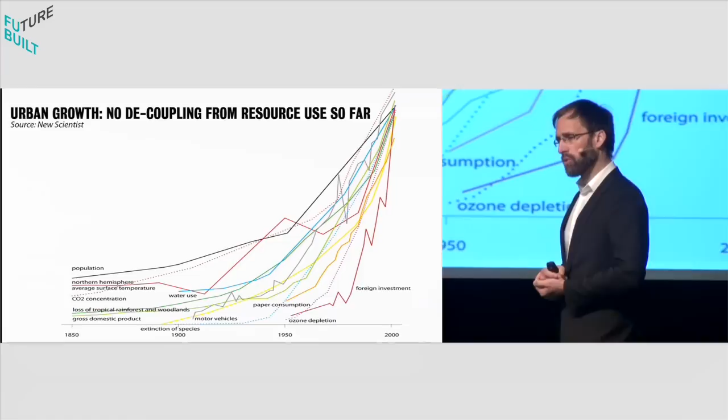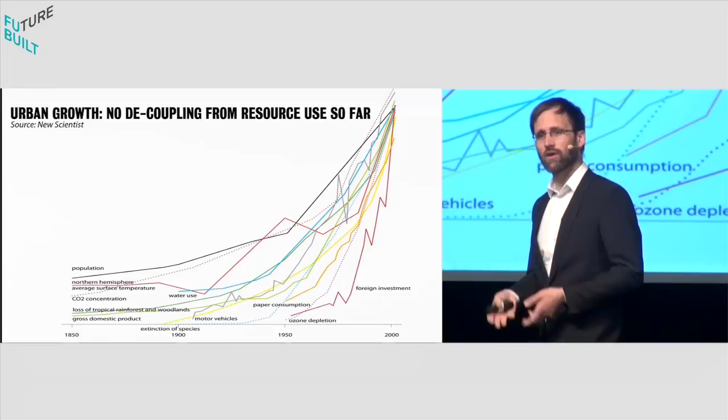I'm showing you here various growth curves, and it's important that we consider growth not per se as something problematic, but that we celebrate positive growth around health, education, prosperity. But clearly, for a finite planet, there are growth curves, and some of them you'll find here, which are hugely problematic: resource use, carbon emissions, pollution.

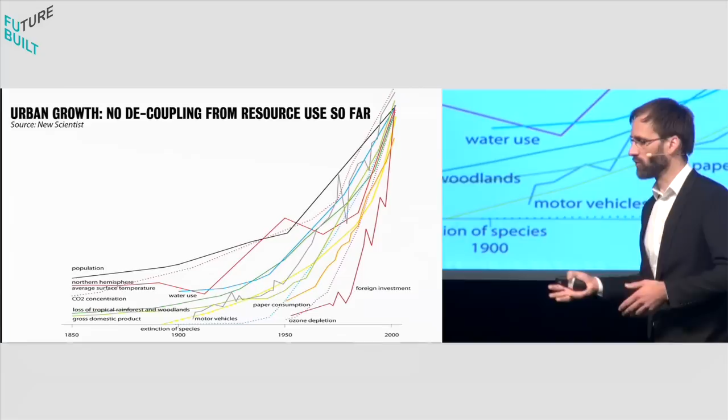Within the next generation, or our current generation, we will start bending these curves and do something which economists refer to as the decoupling of good growth from the bad growth we no longer can afford. And that process will be disruptive, and it will be very much led by cities. That's sort of what I'm mainly talking about.

Before that, there are two areas I should highlight that are specifically important about the building of cities, areas which we often don't reflect enough about.

The first is about the embedded energy demand and the embedded emissions that result from simply constructing buildings and cities. So not only the operations, but just constructing buildings.

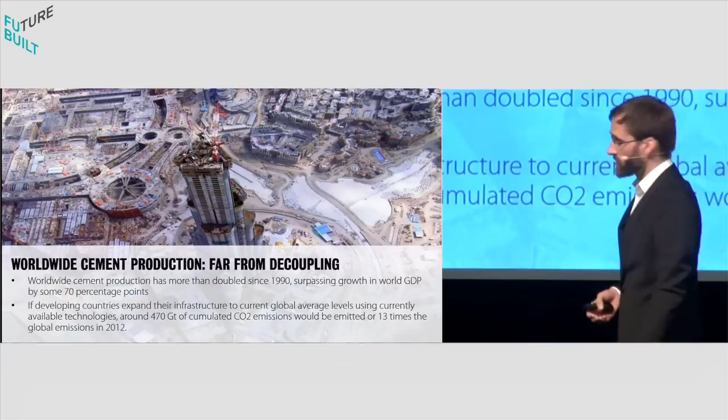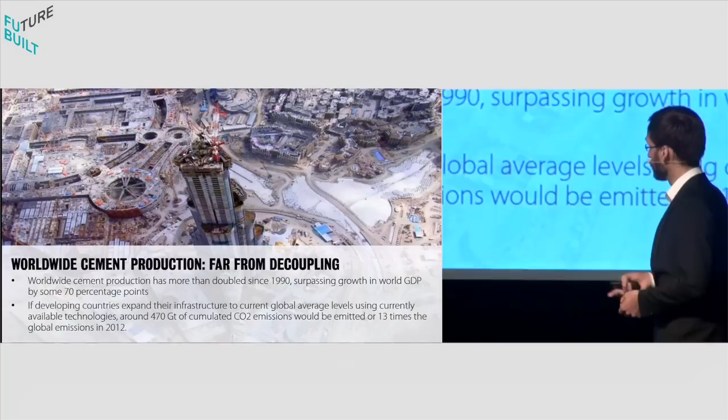If we're looking at this, it's a sort of very sad reference where we're realizing that rather than decoupling, we're doing the opposite. We're actually using more and more energy to get relatively little economic output. Worldwide cement production, since 1990, has actually surpassed the growth in global GDP by some 70 percentage points.

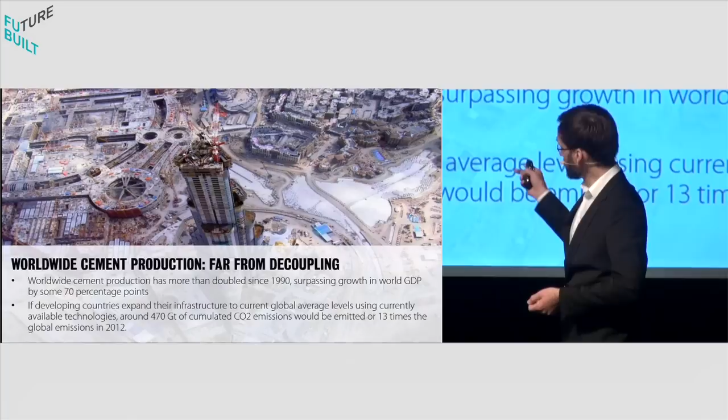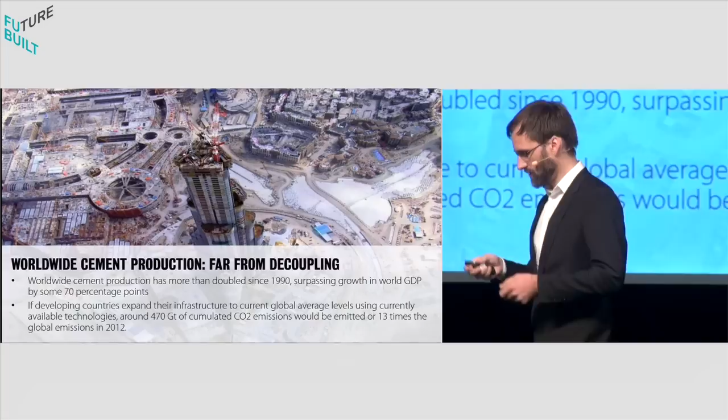That's a troubling story, and it's getting even more troubling if we're thinking about embedded carbon emissions. If we simply continue building cities as we have done so far, predictions are that within a short time, we will increase global carbon emissions by 13 times what the emission was in 2012. Only by continuing to build using steel and concrete as we've done so far, we will already be challenged in meeting the 2-degree centigrade objective. So we really need a big U-turn on the construction side itself.

We also need to talk about land take of cities. Urbanization is very intensive at the moment when it comes to land take. In a period of only 30 years, global urban land is predicted to increase threefold - this is only from 2000 to 2030. Managing this urban expansion, ideally reducing it, is probably one of our biggest responsibilities.

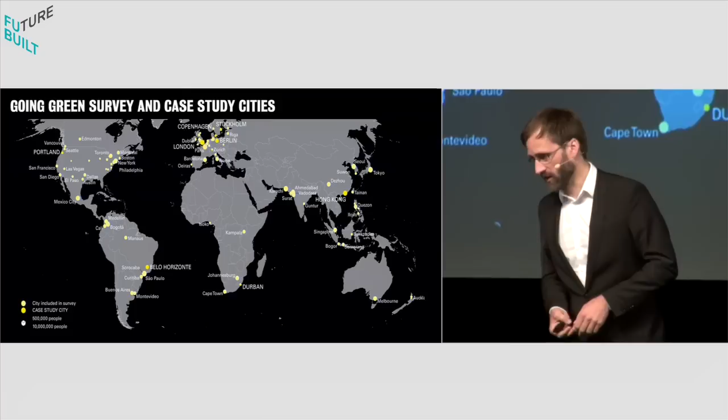So with that, let me come to the survey which I'm going to build on for my main arguments. We interviewed, a few years back in the run-up to Rio+20, about 100 cities worldwide, asking them how they experience bringing together economic policymaking and green policymaking. We looked at about 8 cities in greater detail, where we spoke to local officials and did a lot of data research to verify the broad macro story gathered through the big overview. So what I'm going to do is give you teaser pictures of the macro story, but also go deep into specific case study cities and experiences on the ground.

With that, to my first overview on cities as first movers, to give you a sense that this idea of pioneering cities is not just a cliche, it's actually happening. We have relatively robust data on the decoupling of economic growth, of prosperity, and at least local emission impacts for a range of cities.

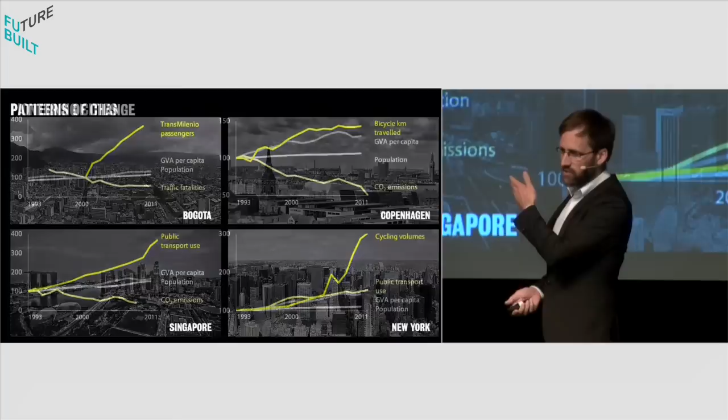I'm using here a few examples. These are wonderful decoupling curves. What you see here in gray is, in all of those cities, a considerable increase in traditional economic growth and population, and at the same time a real improvement using different indicators on the environmental front.

An extreme case is Copenhagen, with a considerable reduction of carbon emissions, which is actually not unique to that city. We've done detailed work in Stockholm, a similar story, and as far as I know Oslo is not that different either. From '93 to 2011, we have an increase of the city's economic output by almost 40%, and over the same period, a reduction of carbon emissions to 70%.

Now we need to be careful here. A lot of this is linked to deindustrialization and simply outsourcing the emissions, so that's one part of the story we need to tackle. But at the same time, we also know that from building retrofits and dealing with our transport systems, these are very real emission savings which will help us enormously in the future. Mark Watts will talk more about the pathways cities will develop in the future, helping with this equation.

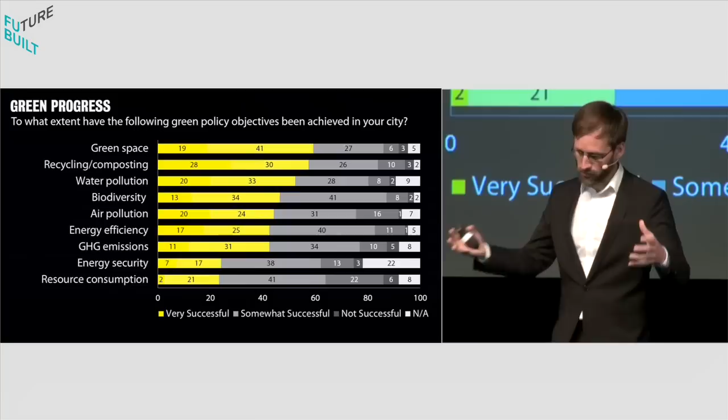Anything that these subjects respond positively to is highlighted in a shade of yellow. The more negative ones are in gray, and then we rank the results from most positive to least positive.

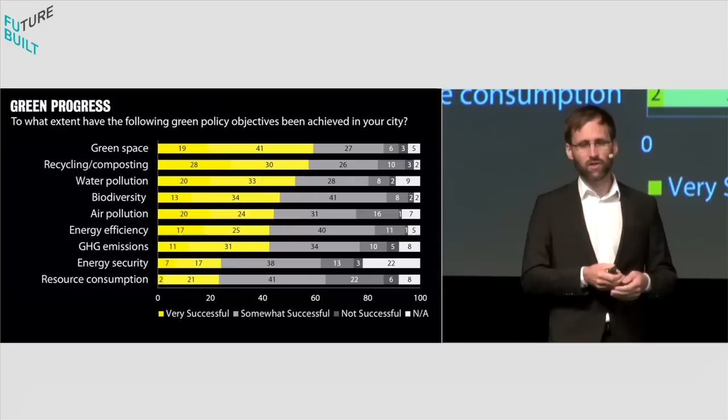Here's the question about green progress: where have these roughly 100 cities been successful in achieving green policies? It's the low-hanging fruit, of course, of green space provision, recycling, composting, water pollution. These have been addressed rather successfully in the majority of those cities. The big ones—greenhouse gas emissions, energy security, resource consumption—are still to be tackled, and we know where the problem lies here. A lot of it has to do with national and international frameworks.

Another bigger question we asked was about the trigger of these green and economic policies. In an interesting way, we have a combination here, unique to cities, of public opinion driving a lot of this, together with political leadership. In fact, there are very few cities where you'll find progressive policies that aren't linked to a name, and some of these names are in the room. Janette Sadik-Khan will speak later about her experience in New York. That's a unique situation where the combination of public opinion with leadership can really lead to transformative change. So the progressiveness of cities is something we can capture.

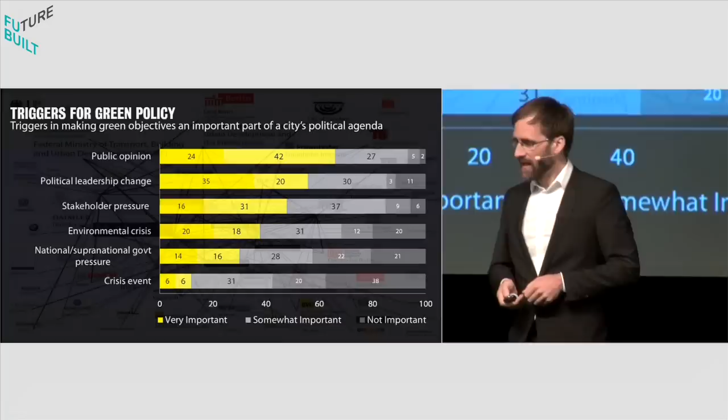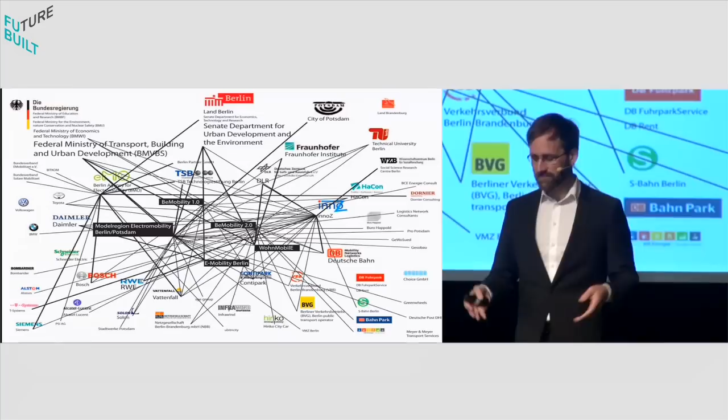Another area where cities are very good is becoming a broker, convening very different stakeholders. This is an overview of a rather complex matrix and network of collaborators currently delivering the so-called electric vehicle and e-mobility revolution in Berlin. It's very confusing, but the reality is that cities are better positioned than most other tiers of government to bring these players together, give them a focused area to intervene, hold regular meetings, and most importantly, often use the general public as the people trialing new ideas and reporting back—so you get a very interesting innovation cycle. The convening power of cities is a very significant advantage.

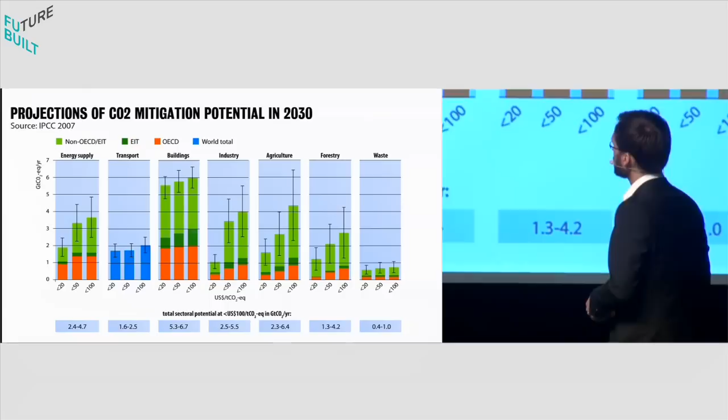So let me move to my second point, around policy sectors where cities are really making a difference. I'll step back for a moment using a slightly older chart by the IPCC, looking at where the real big potential is for carbon emissions. This is globally, not only for cities. Which are the big sectors?

Just to make one point, the session you're going to have later on buildings is exactly the right one. Clearly this is the area where a lot is happening, where again we have low-hanging fruit—the costs are relatively little in terms of bringing carbon emissions down. But there are other sectors, transport in particular, I'll come back to that, where the cost equation doesn't look as good right now; this is the real make-or-break of the climate story, because we're struggling to bring emissions down in transport especially. Here, just to highlight buildings, I'll give you some sense of how we, with our work with the United Nations Environment Programme, used a lot of good prior research.

It's a well-known story about the actual financial and economic benefits of going green. Kats, at that point, calculated that per square meter of a green building, in US dollars, over a 20-year period, you actually have a return in net present value of between 500 and 700 US dollars. Interestingly, the main return isn't related to saving energy—it's actually related to something else, the productivity at the workplace, quality of life issues, which are normally very hard to capture. Capturing these benefits is, in essence, the bigger challenge than the benefits existing in the first place. They are very real, they do exist, and I think it's part of the business model question where we're struggling to incorporate them appropriately.

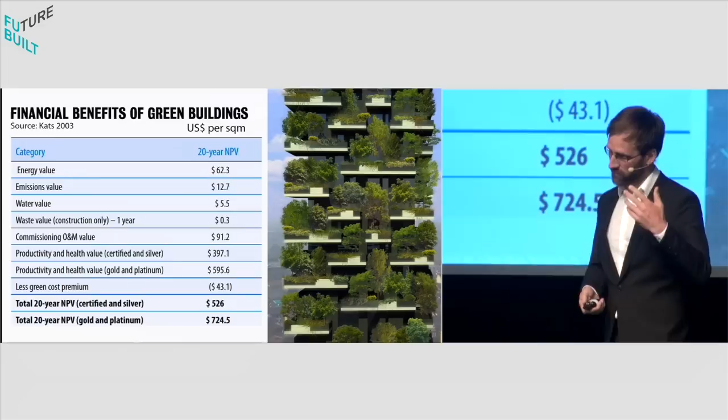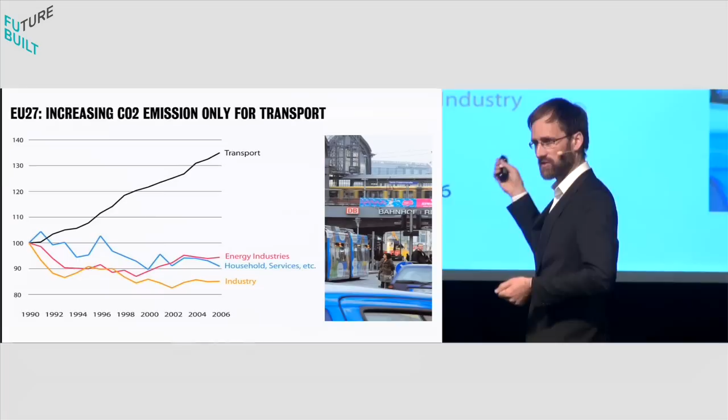I said transport is a problem—that's the chart I usually use to make that point. It's the EU27 perspective, at the time 27 member states, carbon emissions from 1990 to 2006, a highly urbanized context, so we're talking mainly about cities, and a context where arguably the ambition to reduce carbon emissions has been greatest around the world. You see some progress for energy, households, and industry, but it's transport that's going through the roof. This is really the make-or-break, as I said, of the climate story. The good news is cities are well positioned to make a massive difference in that sector.

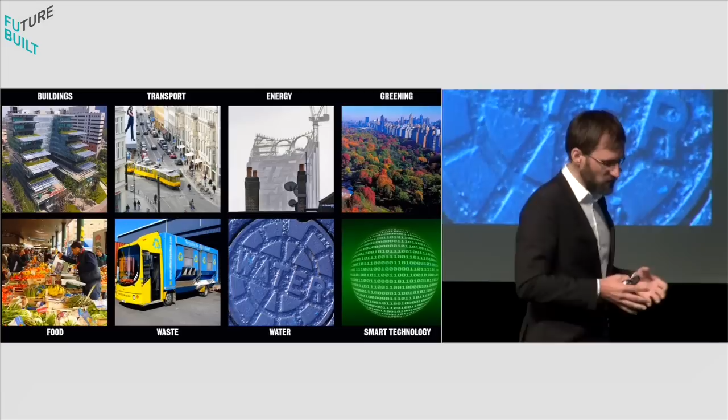Cities are often positioned as a context where policy making across sectors can really benefit from collaboration and much greater cross-sectoral integration. While that is true, particularly for planning, when we surveyed those cities, we were still able to get clear information quite contained within those sectors. I will now talk about the specific progress in these sectors and how we were reported back on what was successful and what was less successful.

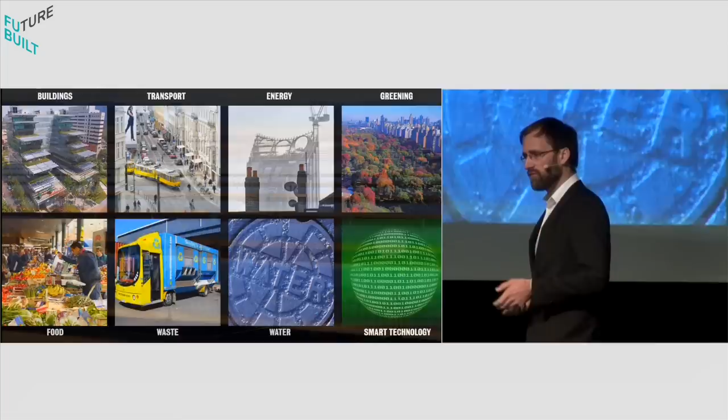Before going there, a very important test case about how cities can actually intervene in those contexts is about their actual power. Let me illustrate that with a nice comparison here.

We have done a lot of research that looks specifically at where cities actually have a say, which are the leading urban sectors. What you see here are classic areas of intervention or policy making, and anything in red is more city-related, whether at the metropolitan, city, or borough level. Anything in grey is usually higher tiers of government. You get a very clear hierarchy if you look across the board, with, of course, massive variances between cities.

Spatial planning, culture, utility, transport - classic urban sectors. This is where cities are leading. By contrast, it's more difficult to expect cities to lead on broad environmental policy, economic development, education and health. We need to keep those broad issues in mind.

So let's move on to one area where innovation has been massive and where cities have been celebrated probably more than in any other area, and that is urban transport. A classic urban area - I don't even have to superimpose the names of those cities because they are so much talked about across the world, in the general media, in TV programs. It relates so much to our daily experience in these cities, whether as tourists or residents, that we just know about it.

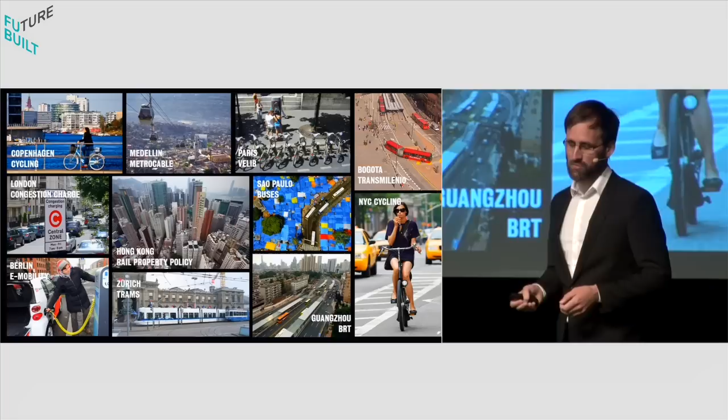And that is good news, because a lot of these projects not only make a difference in the city where they are taking place, but they have been stolen as an idea, scaled elsewhere, and are replicating themselves at an enormous speed. We're just seeing now the scaling of a lot of those interventions.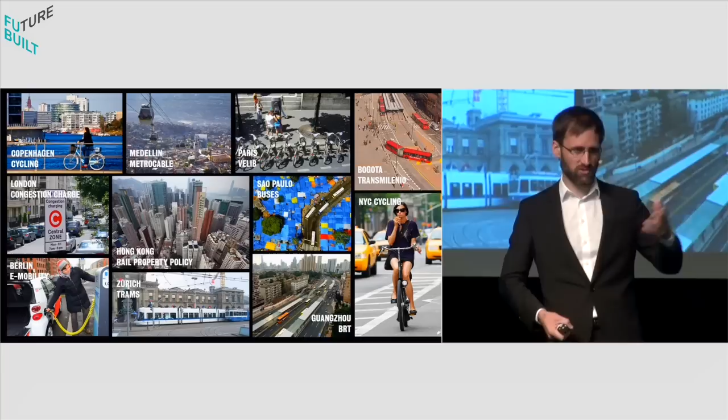At the same time, urban transport - a very urban sector - if you look in more detail into the transport sector, it's very multi-scalar and multi-level in governance. There are many cities where, particularly when it comes to big infrastructure spending, they entirely rely on their national governments. There are other cities which are told by their states they can't do congestion charging. So this is an issue we need to consider. While yes, mayors can make a big difference, it's often the national frameworks that allow them to be that innovative.

We then asked the question: which are the sectors where cities really see the opportunity of bringing together the economy issue, breeding local economies and fostering economic growth, while at the same time going green? And that's, as you heard before, where transport, energy and buildings come absolutely first.

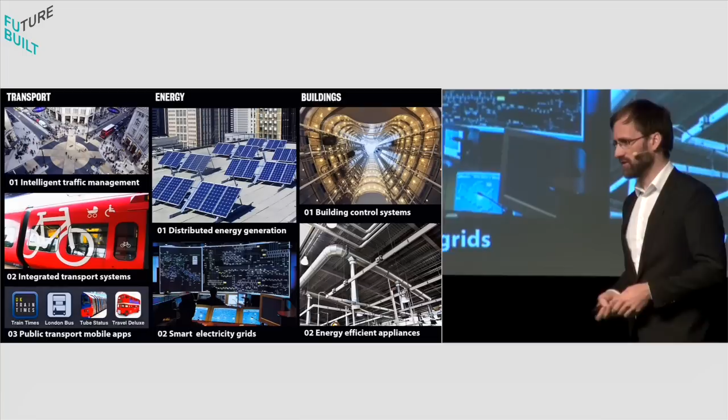We also asked about what kind of technologies are associated with local innovation that then is scaled and applied internationally. In transport, it's intelligent traffic management, integrated transport systems, and mobile phone apps, which I hope by now we all use.

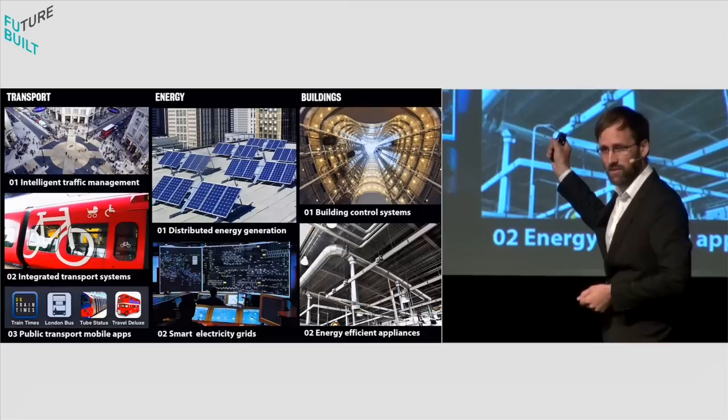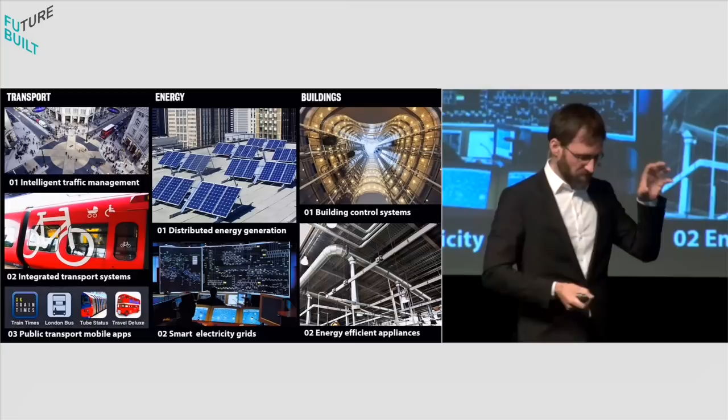In energy, it's of course distributed energy and smart grids, and in buildings, building control systems and energy efficiency. These lists were very long, but those are the headline figures which, two years ago, cities felt is where they really breed technologies locally, which they apply for their own context, but also hope lead to industry applied internationally.

So to come to my last point, you already saw that spatial planning expertise is particular. It seems to be led very much by cities. It's fair to suggest that cities, more than any other governmental context, are probably in charge of shaping our physical environments. That is good news. It's great news that this dimension is in the hands of more progressive leaders, because it has enormous long-term implications.

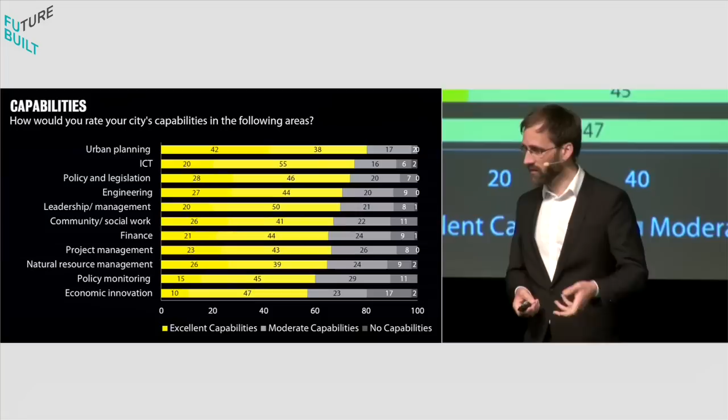No surprise here: number one, ranked by cities as their internal capability of dealing with different things, was again urban planning. This is fantastically good news, because the shaping of our physical environments has enormous long-term lock-in effects.

One example: transport. Using two cities at a similar wealth level, both appreciated by their residents for a similar quality of life—though a very different type of quality of life—Atlanta on one hand, and Berlin on the other, also similar in population size. The way these cities work is almost incomparable.

You see first in black the footprint of the built-up land, and superimposed in red, the public transport infrastructure. Of course, a massive difference. Now, where this story becomes really interesting is when you talk about the choice people actually have in terms of traveling in these cities. Less than 10% in Atlanta travel by public transport, walk, or cycle, and that share in Berlin is almost 70%.

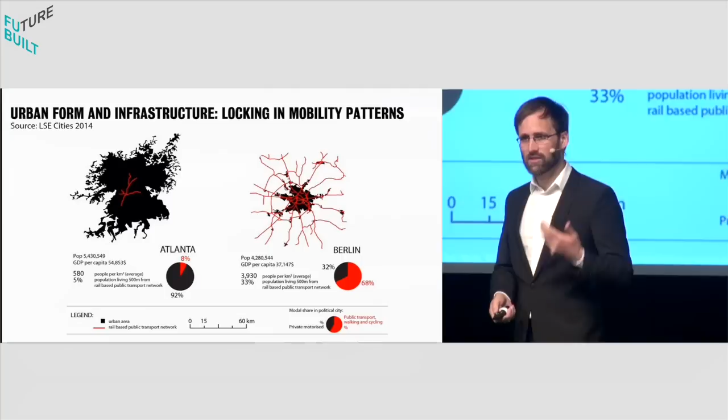Now, that is not only a choice, a form of freedom which Berliners have and maybe people in Atlanta don't have, but it directly translates to the energy equation.

We have done very interesting work for the Global Commission on the Economy and Climate, estimating the subsidy or externalities related specifically to the context of US-American sprawl. This is a conservative figure: $400 billion US dollars per year. In fact, this ranges even beyond $1 trillion US dollars per year. These are costs related to operating these sprawling environments—infrastructure costs, health costs, accident costs, all the way down to social costs in terms of what it means running families in these different contexts.

So that's a big health warning. At the same time, we also know how much we can save in the future, particularly if we consider the massive infrastructure spending gap. Not a country like Norway might have, but if we're talking to India, if we're talking to China, these are issues that do matter.

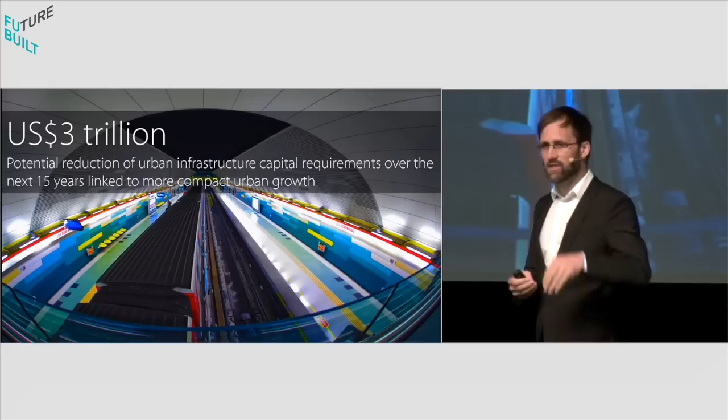We estimate that we can save, over the next 15 years, something in the region of $3 trillion US dollars if we were to move towards a more compact, connected, and coordinated form of urban growth. So to finish on this point, I wanted to highlight that this is where we go back to our economists and talk about the core asset of cities around this compactness and density.

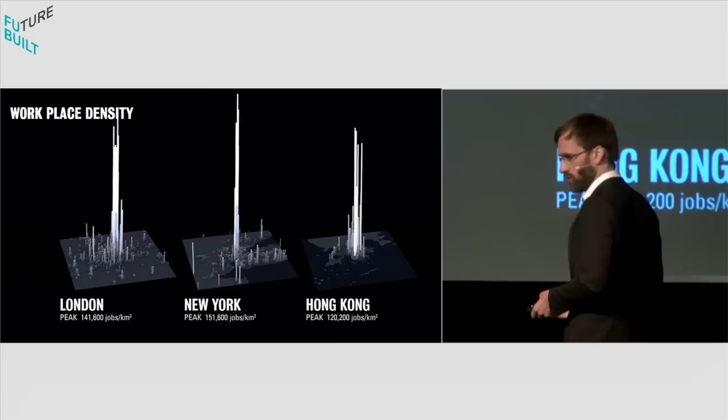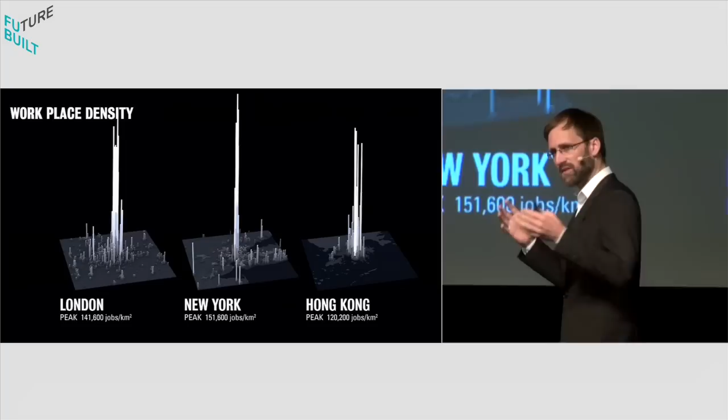I use here the example of three cities which are world finance centers—London, New York, and Hong Kong—showing you the workplace density. That's an old story, well understood. Finance at that scale needs to be very close together, very compressed: 150,000 people per square kilometer working together, helping this global economy. And it's not only the finance jobs themselves, but all the surrounding services that cluster and take advantage of these enormous densities.

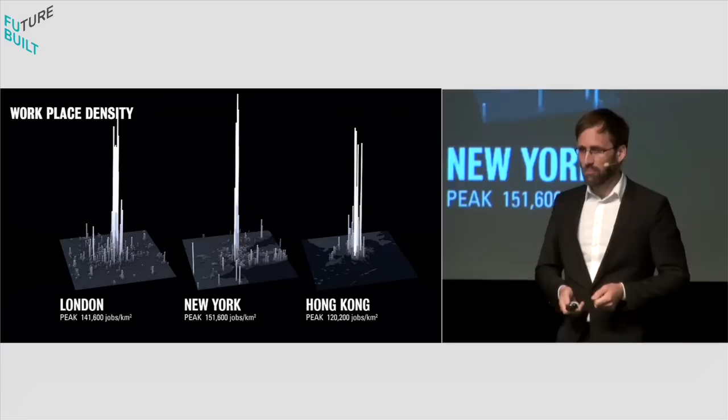What is new is that we're discovering that this dynamic is not only important for the context of finance, but in fact might be important for a whole range of different industries.

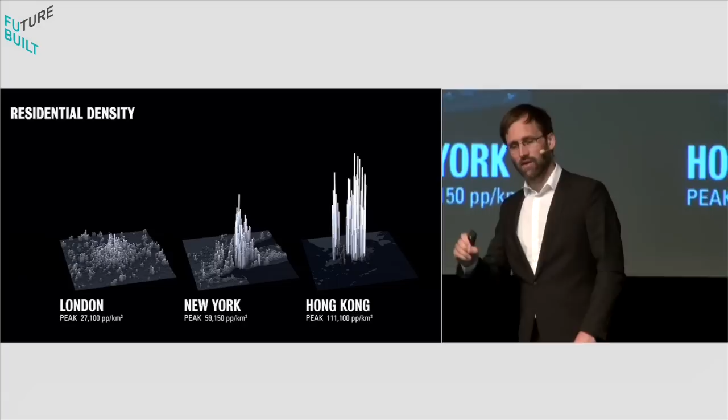Most importantly, the tech industry, which is currently so much promoted in many cities, very much so in London as well, raises a more radical and interesting question: the connection between workplace densities and residential densities. There are strong arguments that we need to bring those more together, creating an ecosystem, a breeding ground of innovation where living and working are connected, and where certainly London's residential densities are too low.

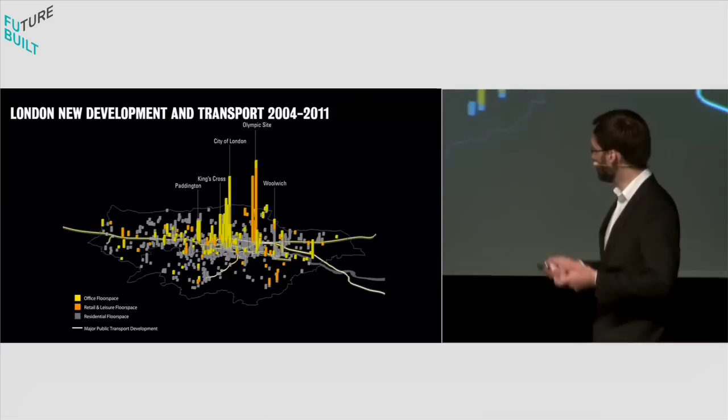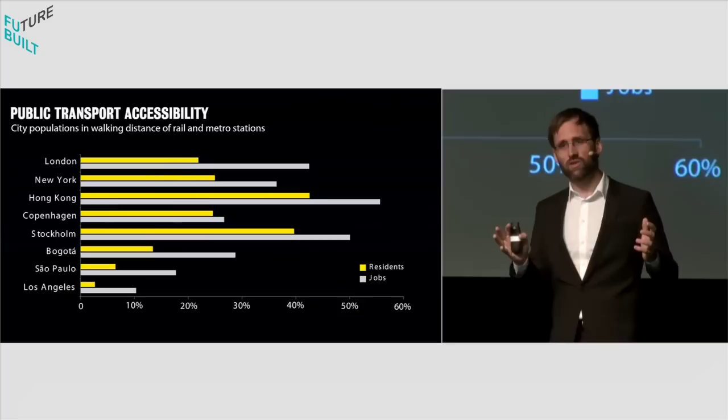This image shows how London has responded. We are densifying the city over the last 10 years, with most of the efforts attached to inner city development. The accessibility we are generating through that is enormous. But I'm also introducing here two Scandinavian cities, Copenhagen and Stockholm, to say don't underestimate those comparably medium-sized cities. They often have public transport accessibility at the scale of even Hong Kong, in the case of Stockholm.

And we will see that in Paris, very much supported also by the work we'll hear from Mark later, and others that are pushing cities into that space. Thank you very much.